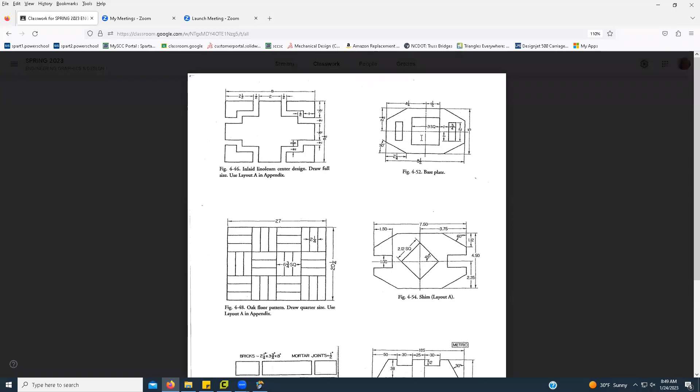Also, when you put it back in your box, you don't want to leave it out really wide. It can get easily broken. So you want to wheel it in about that much when you store it in your box. So yesterday we drew one that was just basically square. We want to add some circles in here, or what we would consider holes if we were actually making this.

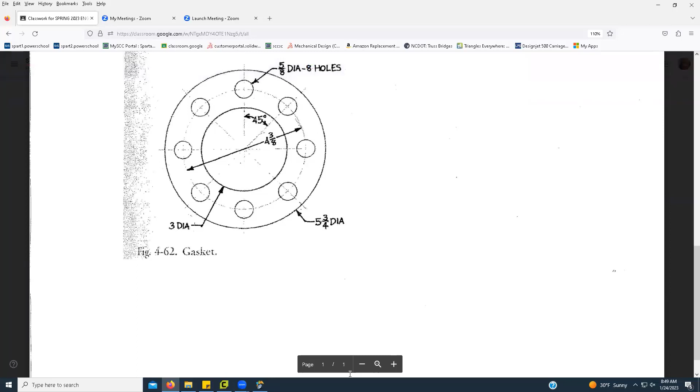So we're going to work off of the single view one handout here. And we're going to go ahead and make the gasket here, figure 4-62. So when we start this, it's a symmetrical drawing. We don't have to do any kind of figuring to get the center point because we can use our diagonals to get the center point.

So the first thing that we need to do, we're going to find the center point, and these are what we call concentric circles, meaning they share the same center. So if we're looking at the inside diameter, that smaller circle, that 3-inch diameter, that shares the same center with the others. So we're working off the same center. And we also have a bolt circle that has the same center. And then all of those smaller holes go around that center point.

So when we do this, we can actually find the center by doing our diagonals. And you guys have done this in a sketch, so you kind of know what to do. Same application. You're going to put your scale out here, and you're not going to get the exact point because our scale is not long enough to go from the exact corner to the exact corner, but it is long enough for us to eyeball it and get super close.

Because remember, it's not as important to get exactly in the center of our paper as it is to get the drawing exactly right. Because we're producing what we draw, not producing the center of the paper. So this is just kind of for aesthetics when you're drawing. So we're going to draw just a line, and then we'll line it up with our other corners.

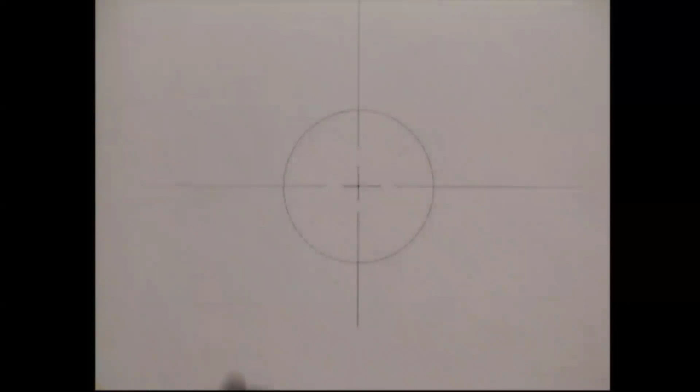So you're going to lean into it. If I'm making this circle, I can start here and lean into the direction that I'm going. So the key here is not to try to hold it with two hands, but try to put pressure on just this point, twist it, and lean it into the direction that you're going. Okay, so go ahead and try it. Remember, you're just twisting it like this, but leaning is the key to you keeping it on the same spot.

Now, if your compass jumps off of that spot, and it will, because your desks are kind of hard and you don't have the padding underneath like I do, just try to get it in that same little hole that is made with that needle point. If you get it in the same hole, then it's going to line up.

All right, the next circle that we can make is that outer diameter circle. And if you remember, that diameter is 5 3/4. So if the diameter is 5 3/4, we need to take half of that for the radius. So half of 5 is 2 1/2, or we could call that 2 2/4, right? If we're taking half of 5, that's 2 2/4. And then half of 3/4 is 3/8. So we could actually say this was 4/8.

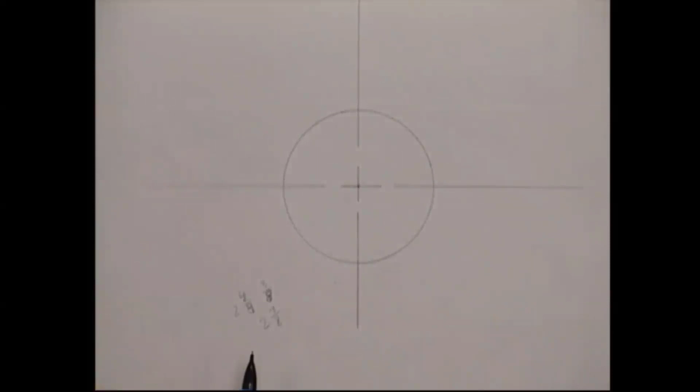We're trying to get the bottom number the same. Fractions are not super hard if you know that you need to get the denominators the same. So half of 5 is 2 4/8, and half of 3/4 is 3/8. So if we do that, that's 2 7/8. So if you break it down, it's not so bad. Break it down into pieces rather than trying to say 2 divided into 5 3/4. You can't use traditional math methods.

So I usually just break down the whole number and the fraction separately and then add them together at the end, which is a whole lot easier. You don't have to do any kind of special math. You're just doing two simple processes. Okay, so 2 7/8 is this radius.

If you remember on your scale, the eighth marks, if we're looking at our 16 scale, the eighth marks are the second smallest line. So the first mark is a 16th. The next one is 1/8, 3/16, 1/4, and so forth. But if we're looking at 7/8, we know that's almost to the whole number, but it's the eighth mark right before the next whole number. So we need 2 7/8.

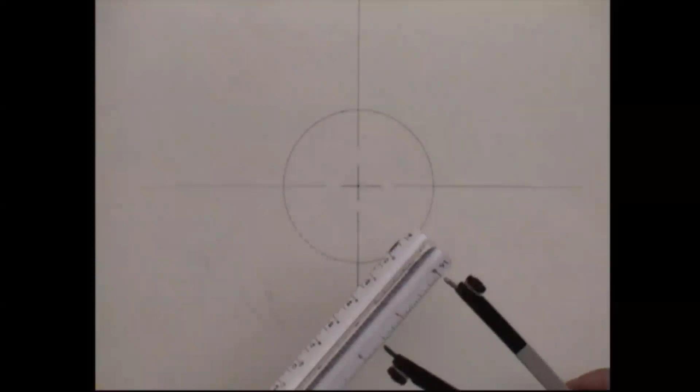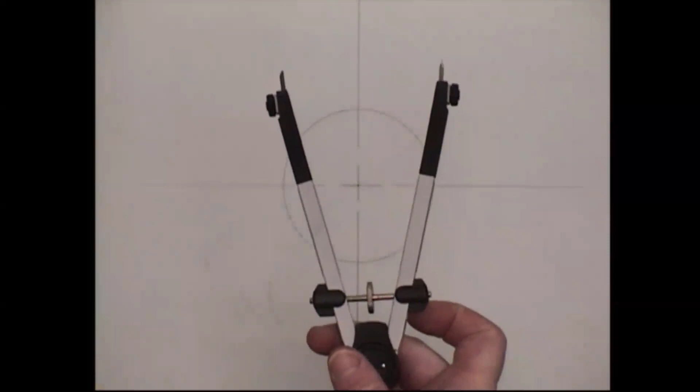So we're going to wheel our compass. I'm putting my needle point on the 0, and we're going to wheel our compass out, and it's going to be almost 3 inches. It's the eighth mark before the 3 inches. Okay. So that's how far our compass needs to be wheeled out. And if you look at just a top view of it, it's going to be about this much. So make sure your needle point is on the 0 and your graphite is on the 2 7/8 mark.

You want to try to use that exact same hole, because remember, concentric circles share the same center. So if we use the exact same hole, number one, we're only putting one hole in our paper. That hole will probably get a little bit bigger as we go, but you don't have 3 or 4 or 5 holes in the middle of your paper. You only have one, and it's acceptable. So then lean into your compass. You twist it with your thumb and your forefinger. Lean into the direction that you're going.

Okay, and we want to go ahead and make these dark, thick lines. These are visible lines, or what we call object lines. When you make them with your compass, you want to make them dark so you don't have to go back over them. And you'll notice my hole just got a little bit bigger. That's okay. In board drawing, you're going to have a hole, but you only want one hole instead of different holes. Number one, that's not very accurate because that's not the exact same center. And number two, it's not very aesthetically pleasing when you look at a drawing and you've got a bunch of holes in the middle.

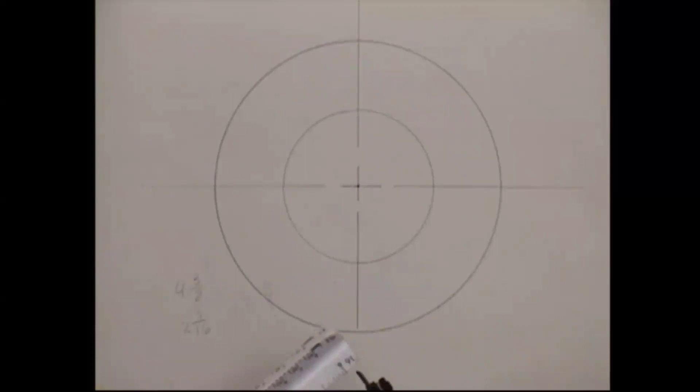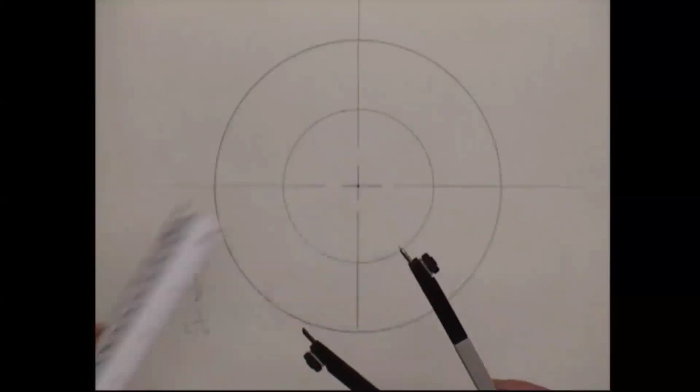So 3/16. The 16th marks are the very smallest on your scale because it's a 16 scale. So we're going to do 2 3/16. Again, you could put your needle on the 0 and wheel the graphite out to the 3rd mark past the 2. It's the smallest marks. That's your 16th marks. So 2 3/16.

The diameter was 4 3/8. We took half of that, which is 2 3/16. And we're going to put our needle point in that same exact spot and make this circle. Now we're going to make this one just a little bit lighter because it is a center line.

We don't try to put the dashes in it just yet. We'll put the dashes in. We can erase them out, but know that this middle circle is going to serve as a center line.

All right, so if we go back to the drawing, we can see that the small holes that go around that center circle that we just made, we call that a bolt circle, because likely these holes are made for bolts or some other apparatus like a shaft or something that they fit over. Because this is a gasket, gaskets are normally pretty thin. You could find gaskets in all kinds of machinery where you need good compression and you don't want air or oil or some other liquid to escape.

So these holes are 5/8 diameter, and we have 8 of those. So if you divide 8 into 360, you're going to end up finding this 45-degree angle. So they're equally spaced all the way around, which ends up being a 45-degree angle. So the first thing that we've got to do to create these holes is find the center point. So we're going to create these 45-degree center lines all the way around.

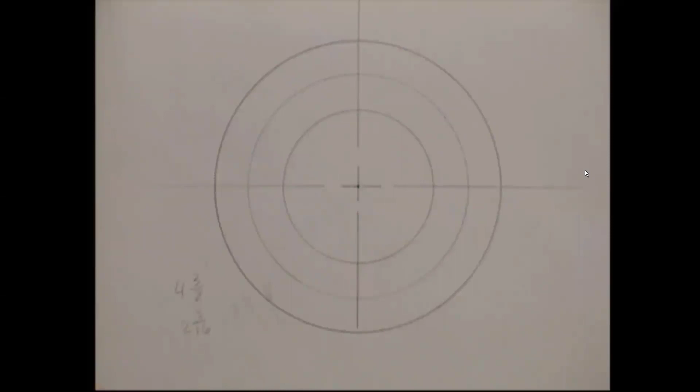We already have the quadrant lines. We have our center line that is at 90 degrees. So each of those points, we call that the quadrant of the circle, but we need to find the 45-degree points. So that's our next step. So when we use our instruments, we already have one that is 45 degrees, correct? We have the 45-degree triangle.

So in addition to your straight edge, we'll add the triangle, and we're going to make these 45-degree lines. So the way that we do this, we make sure it's flush to the straight edge at all times, and we'll just slide this up and down the straight edge to get where we need to go. So we're going to line up our 45-degree triangle with our center point of this hole. So try to line it up exactly with the little hole that your needle point made.

And then from that center, you're going to draw another center line that goes out. So remember, your center lines go just a little bit outside the part. So I'm making this line, you know, about 1/8 of an inch outside that part. And then to get the other 45-degree line, I'm just sliding my triangle over, coming from the center out.

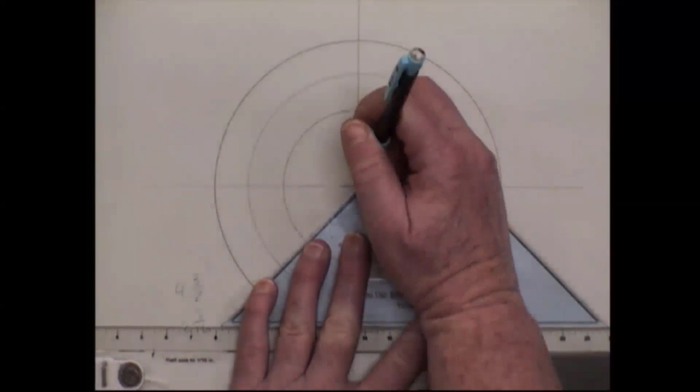We don't have the gaps in there yet, but we can erase out for the gaps when we need to at the end. So I'm moving my straight edge up so I can do the center lines on the top. Now, had I had my straight edge up or had it been a little bit bigger, I could have done all of those at one time. I have a small triangle, so I'm just realigning it and doing it in 2 steps.

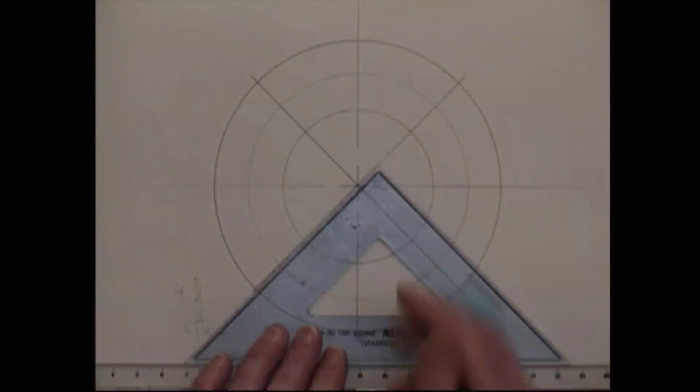So basically, I'm just moving my triangle across my straight edge, lining it up with the hole. And then I have my 45-degree lines. And again, these are center lines. They go a little bit outside of the part. And you want them to be uniform. Like my center line here is a little bit shorter than the others, so I can just add a tiny bit to it.

All right. So now that we have these 45-degree angles, we can make those small circles. So if we look back real quick at our page, the circles were a 5/8 diameter, and we need a radius. So half of 5/8, we times the bottom number by 2. That gives us 5/16. And remember, the 16th mark is the smallest mark on your scale.

So we need 5/16. These are going to be the smallest circles we've made so far. We're going to bring our compass in, and you'll find that the smaller the circle, the harder it is to make with the compass. So 5/16. We could actually just count 5 little lines over to get that 5/16 mark.

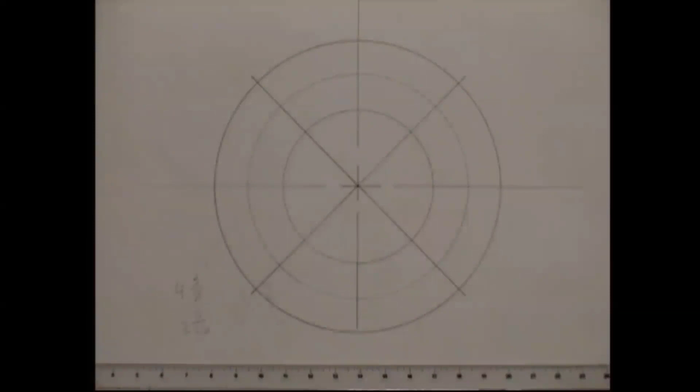Okay, so it's going to be a very small amount of space between our needle and our graphite. But we do have the center points for all these circles now. We have the location dimensions. Just as a reminder, two things we need to know about holes. We need to know where they are, which is this location dimension, which is where our center lines intersect with that center circle. And then we need to know how big they are. So the 5/16 radius tells us how big they are.

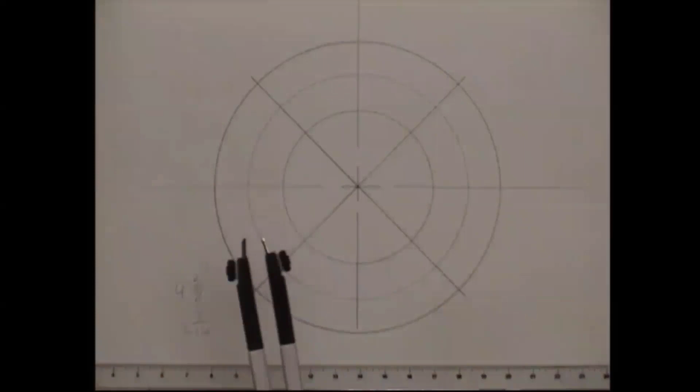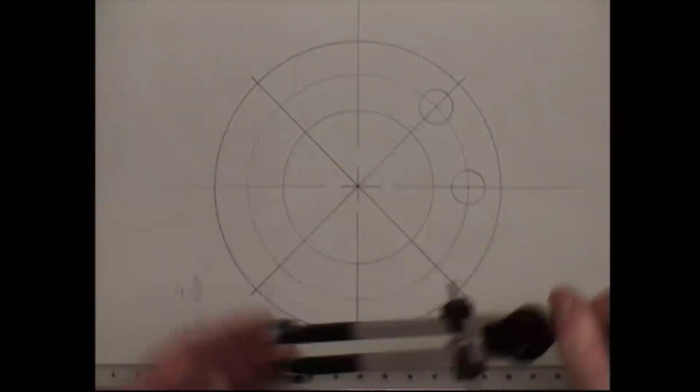So we're going to put our needle point in each one of these intersections and try to make those small circles. Now remember, the smaller the circle, the harder it is to make. So just do your best. This is really good practice. You know, sometimes beginners actually try to hold the compass with two hands, and it does not work out very well. If your lead has kind of died down and doesn't have as sharp of a point, you might want to sharpen that a little bit with your sandpaper pad.

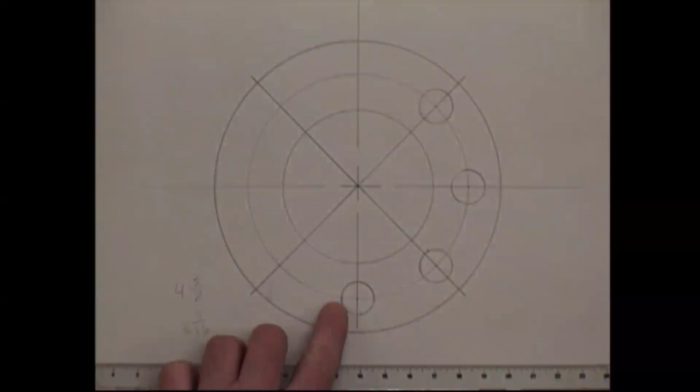And sometimes it's going to flip out of that circle like mine just did. If it does that, just get it right back in that same circle, and you can use your eraser shield later to erase the little pieces that you might have accidentally drawn on your sheet. So you don't have to stop what you're doing. You can go back and erase that. So my line width here is starting to get a little bit thicker. I want to be consistent. So that tells me it is time to sharpen my instrument. Okay, and don't sharpen it over your paper.

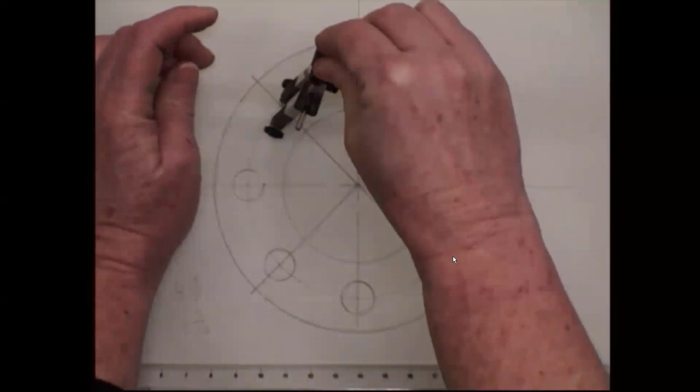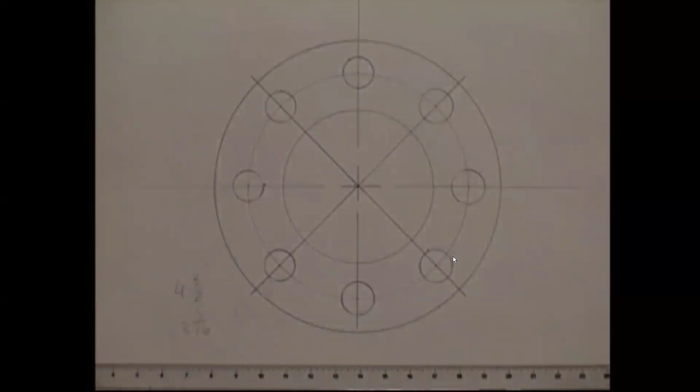So especially on these small ones, if you lean into the direction you're going, it's going to be a whole lot easier to make them. This is your first drawing with the circles, and you can see, mine's jumping out. So if you don't have a lot of practice, yours is probably going to jump out too. Just try to use that same exact hole. You'll find in board drawing, your eraser is your best friend. So if you mess up, that's okay. You can erase it and fix it. And I have a few spots where it jumped out, like here and here, that I would need to use the eraser shield to clean that up.

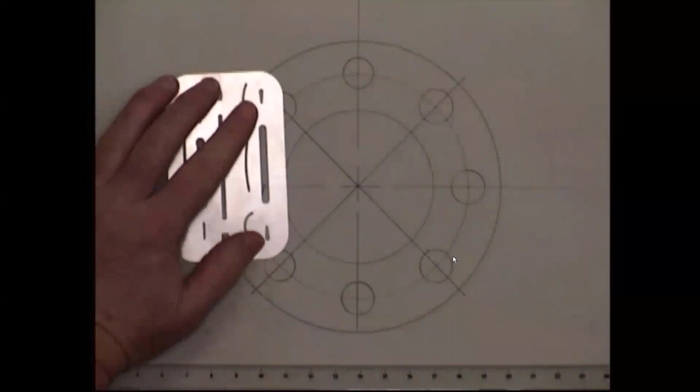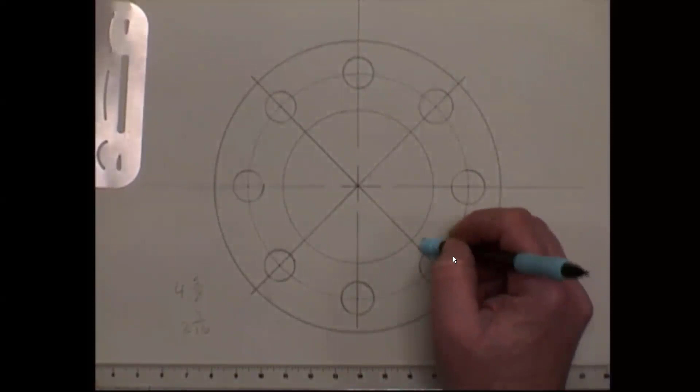So I'm taking my eraser shield, I'm putting it over what I want to keep and just trying to find a little corner somewhere that only has that spot where I want to erase. And then I'll stick my eraser in there, and it protects what I want to keep, erases what I don't. And sometimes you might have to go back over a circle with your compass, but you want to try to make them as uniform as possible while you're making them the first time. These are the ones that, when you're doing a board drawing, you want to go ahead and just make dark and thick as you're going.

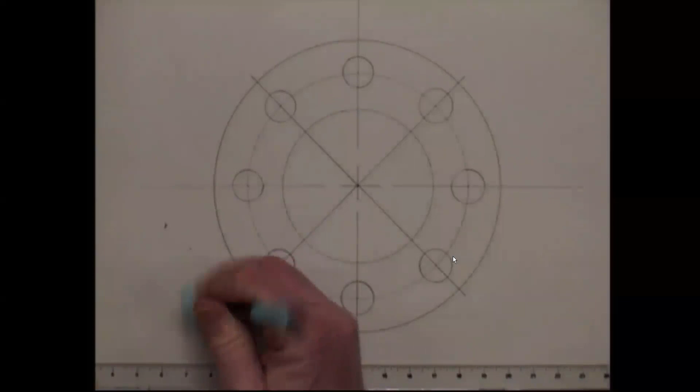So really for the object, we are pretty much done with any kind of functionality of the part. We just need to clean up our drawing. We're not going to put dimensions on this one on the board drawing. Eventually you will start doing dimensions in AutoCAD, but for us, we're just learning techniques. We're learning how to use our scales. And you will have a greater appreciation for AutoCAD once you get in there, if you've had to do it on the board.

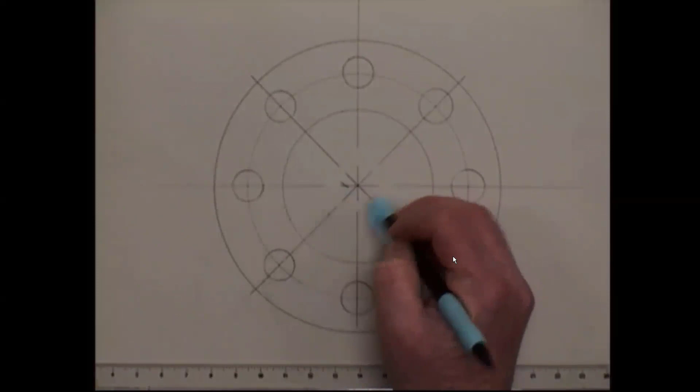So after you get the small circles, we do need to put some gaps in here for our center lines. This larger gap right here that we have for the main center, we need to straighten that up a little bit. We also need to have gaps in the angled lines that we made with our triangle. So our center lines in the middle here should have gaps between the main center point and where the lines extend out. Also, we need to have smaller gaps, and this might be where your eraser shield comes in handy. You can put it next to your center mark here. You want to have smaller gaps right here at the small circles.

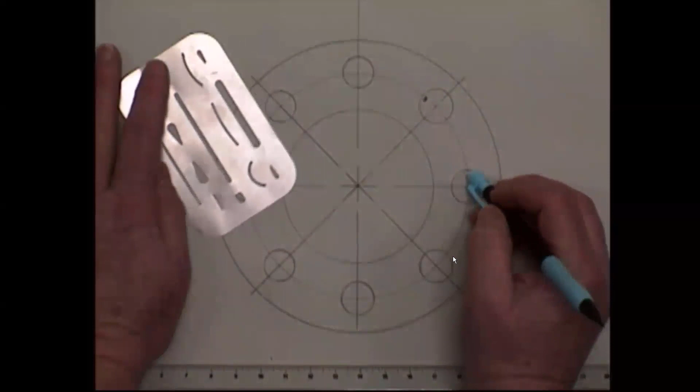So we still need to have the small plus sign in the middle to show the actual center. And then the rest of the center line is just a long dash. So your center line should have a short dash, a gap, and then a long dash. And that's what we need to do all the way around this center circle, or this bolt circle, and those lines that we made at 45 degrees. So we could take some time and clean that up, get the gaps in our center lines.

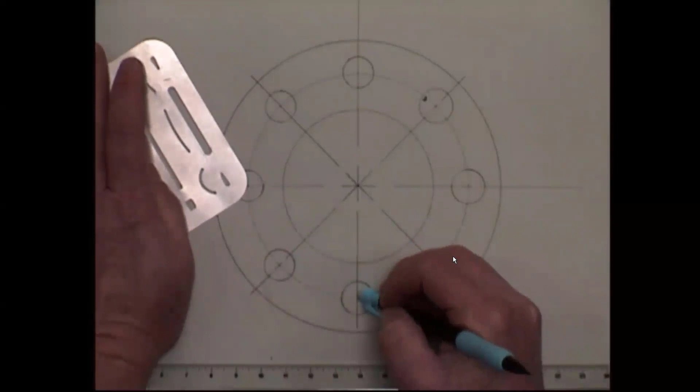We want to make sure, especially on board drawings, that you try to have uniform thickness. In AutoCAD, we can set our line thickness so it's not as hard. But like I said, if you are board drawing and then you transition into AutoCAD, you do have a greater appreciation, and you also have a greater understanding because you know what the system is doing behind the scenes.

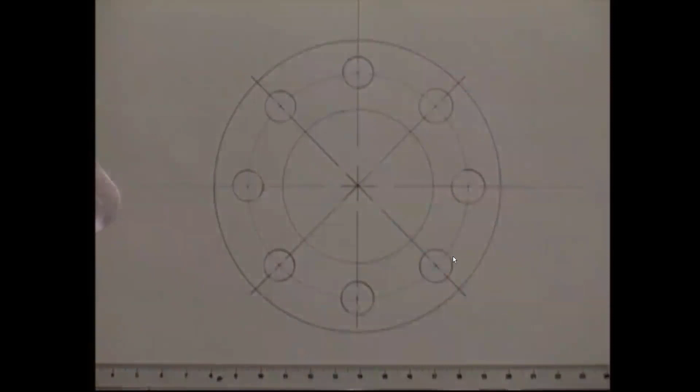We also want to ease down these center lines. Mine are not as uniform as they need to be. So I want all my center lines to go outside the object about the same amount, and that should be about 1/8 of an inch. That's the ANSI standard.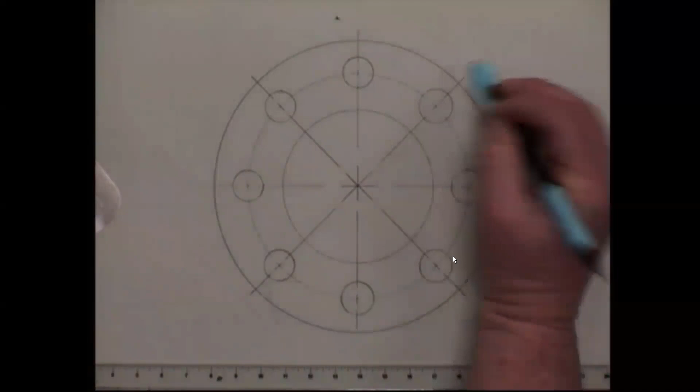This one is not quite long enough, so I'm going to put my straight edge back up there. You really don't need to make any lines without a straight edge. So I'll put my straight edge back up there.

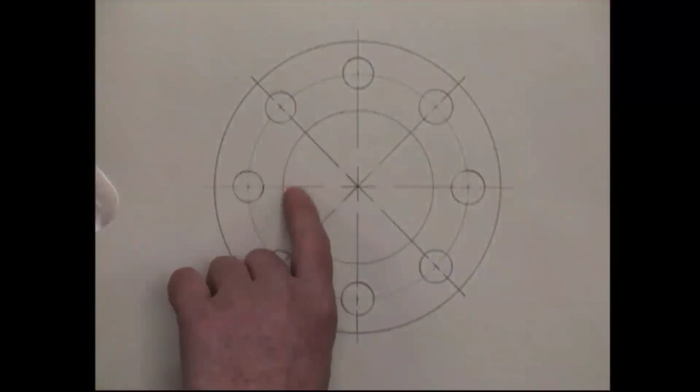I have a nice, fairly neat drawing, and I can continue cleaning this up a bit or making my lines the same thickness. Some things that you can kind of catch here in the camera: you can see this line looks a little thicker than this line. I really should have my center lines about this thickness. So that might be just a little bit too dark for a center line. Those are the kinds of things that you can look for when you're cleaning up your drawing.

So you can go back and finish cleaning up your drawing. Even if you haven't made all the circles, that's fine. We'll go ahead and proceed with our border. Now you've done borders before. We did one on the board drawing yesterday. You've done them on the sketches. The thing you need to remember with the borders, it is the darkest, thickest line.

If you're using the 16 scale, you're going to go in 1/4 of an inch all the way around your paper. So remember, that's basically just putting your 0 on the very edge of the paper, going over 1/4 of an inch. You can make a little mark. You're going to do this all the way around. So if you're not at this point, that's fine. You can proceed with me, or you can stay cleaning up your drawing if you feel comfortable with your border. If you do not feel comfortable making your border, go ahead and proceed with me.

So the first step is getting the actual border line. And this is the darkest, thickest line. We can go ahead and make it very dark and very thick. So with our straight edge, we are coming to our 1/4 inch mark that we just measured and drawing that dark, thick border line.

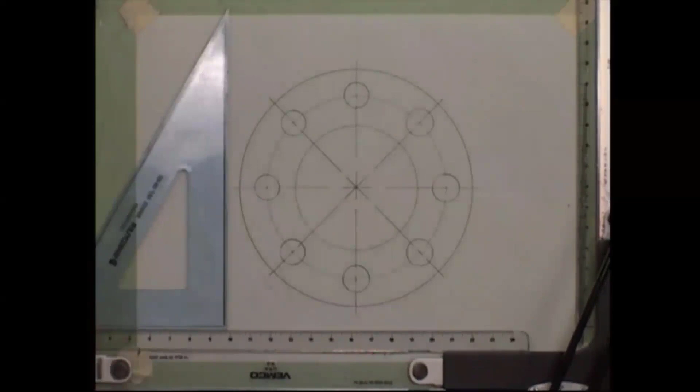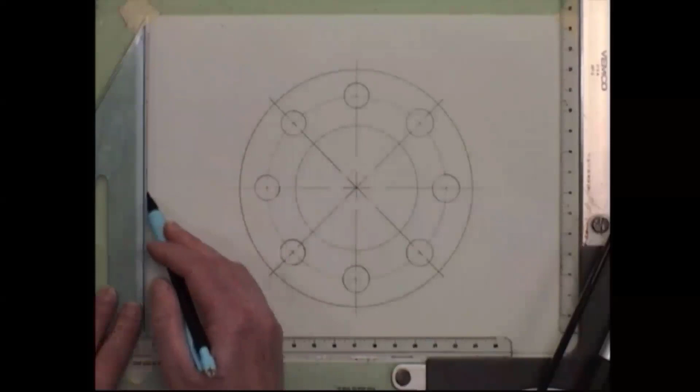And I want to make sure that I have it on my straight edge, and I want to make sure there's plenty of room. If you can see over here on the left, I don't want just a little bit of it on my straight edge. I want to try to get as much as possible on my straight edge so it stays firm as I'm drawing. So I need to keep it flush and up against my horizontal straight edge. Okay. And my triangle's not quite long enough, so I do have to move my straight edge to get all of this.

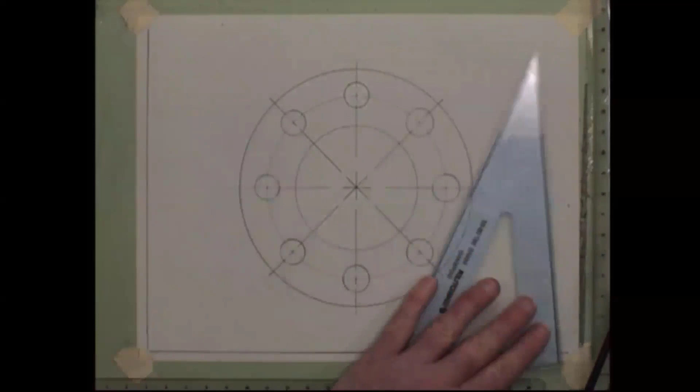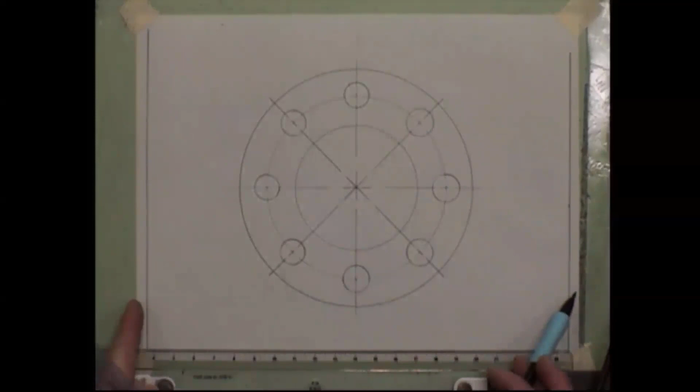So to do the border, I went in 1/4 inch all the way around. My paper is 8.5 by 11. So you're basically making your border a 1/2 inch smaller all the way around. So if this is 11 inch, between the border lines, it's actually 10.5 because we put a 1/4 inch space on either side.

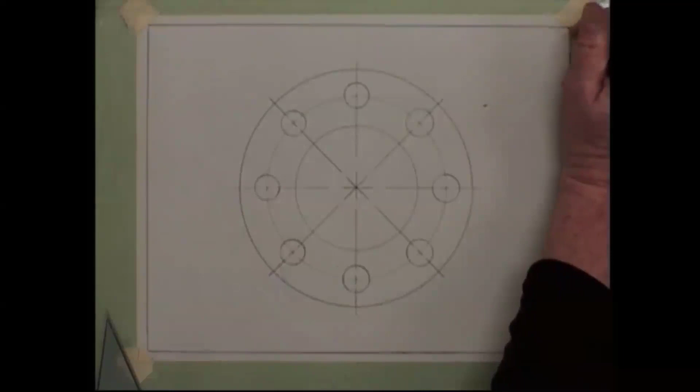We're going in 1/4 inch all the way around to get our border, and then for the title block, I'll put up the measurements. But the distance between the border line and the edge of the paper, 1/4 inch. And that follows the ANSI standard. We're using the ANSI A Form 3 template.

And if we look at the rest of it, we're going to do a 2-level title block here. The first line, we already have the border line down here at the bottom. The next line up from the border line is 3/8 of an inch. And then the next line up from there, this top of the title block, is another 3/8 of an inch. So we'll go 3/8 up and then 3/8 up.

Our letter height was 1/8 of an inch. So that should give us about 1/8 of an inch space at the top of the letters and the bottom of the letters. And it should be centered as much as possible horizontally in the box that it's in and vertically. So we will do those horizontal guidelines to keep the letter height at 1/8 of an inch. But as we're putting on these lines, we'll just go over and measure for the vertical lines and go up and measure for these horizontal lines.

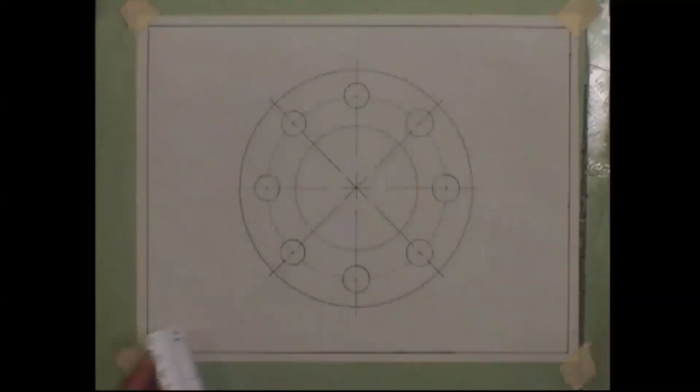But it's 3/8 of an inch from the bottom of the border to this first line, another 3/8 to the next line. And the 3/8 is important because that's going to follow the lines for your lettering guide. So if you're off on your measurements, your lettering guidelines are not going to work correctly. So make sure you get 3/8 of an inch for this title block.

Then we went over 2 1/4 and 4 1/4. So I'm going to leave this up for just a little bit so we can get our vertical lines. And that 4.87 is 4 7/8 in fractional form. So in the end, our boxes will look like this. Now we're ready to do our lettering.

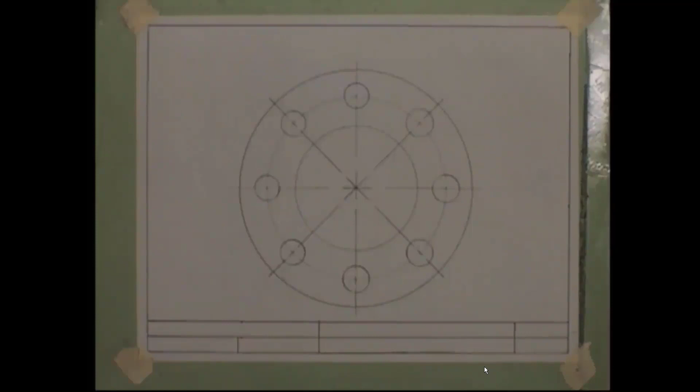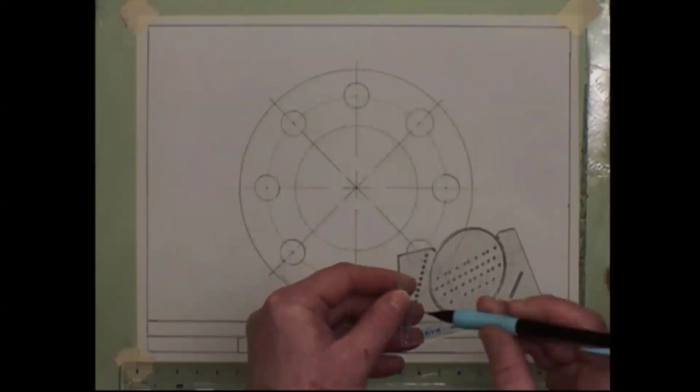And I know we used the lettering guide yesterday, but just to reiterate, we're going to use these holes on the side. They are already 1/8 of an inch apart. And we will stick our lead in one of the holes, but before we decide which hole, we're going to line 2 of the holes up with our border that we created. So down here in the title block, 2 of these lines should line up in the holes.

So if I choose this hole to line up with my line, then there should be 2 holes in the middle, and then that third hole should line up with my top line, because remember we made that 3/8 of an inch. So I should have 2 holes right in the middle, and then the outer 2 holes should line up with my border and my title block. This should be flush up against my straight edge, so make sure it is.

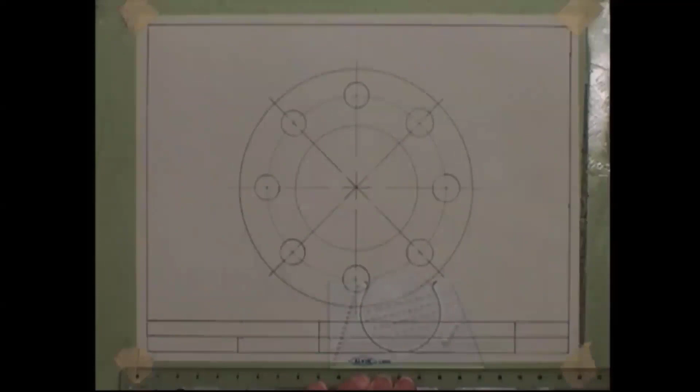And like we said before, you're going to feel like you need 3 or 4 hands to do this, but you'll get good at it. You'll apply pressure with your pencil to hold it down to the straight edge, but you'll just go across, and you really only want to put the lettering guidelines where you're going to letter something. And these should be super duper light. I'm making mine a little bit darker so you can see it on the screen. But these should be super light, so you don't even really have to erase them.

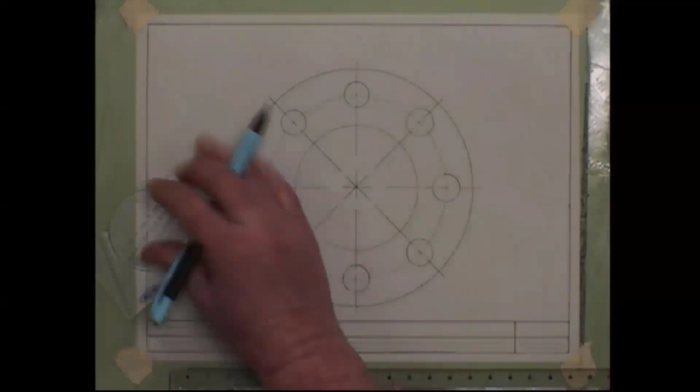And if you jump off, like mine jumped off because I came to the end of my straight edge, you just want to make sure that you get back lined up before you start making your guidelines again. And the same thing at that top title block, you should already have 2 of them lined up, and you'll just choose the 2 holes in the middle. So sometimes this happens. Mine just jumped right off the edge. That's why I said give yourself plenty of room on this edge, because if not, your instruments will not stay straight. So I'm going to get lined back up.

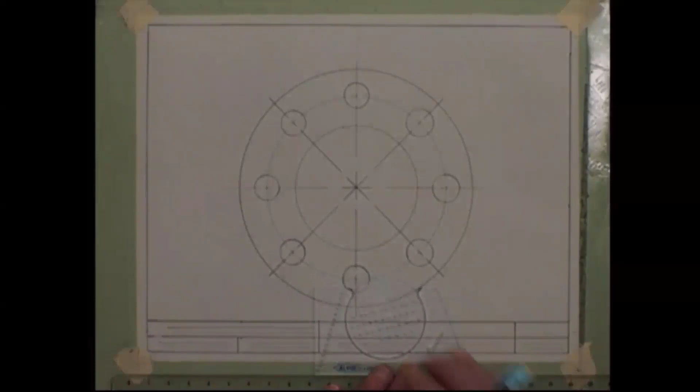So in the first box on here, it's blank, but we'll put on Swafford Career Center. Remember, all caps. In board drawing, we're using vertical uppercase Gothic. We're not slanting at all. We're making it 1/8 of an inch, all caps. The approximate distance between your words is your pinky finger. Unless you're a guy and you have really big pinky fingers, you might want to do a little less than that.

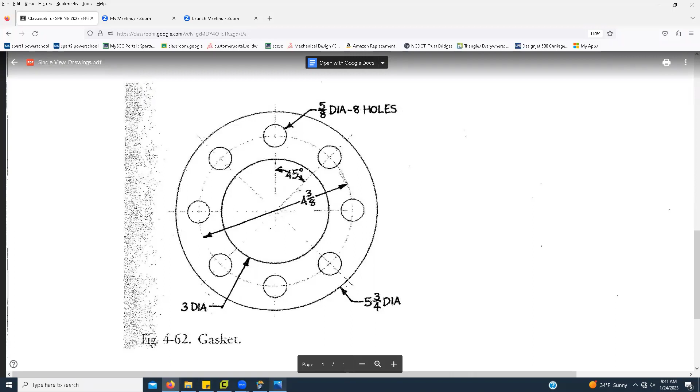And this figure number, let me look real quick. It was 4-62, and the title was Gasket. And remember, you can just shorten figure with FIG. It's very common to use abbreviations in mechanical drawing.

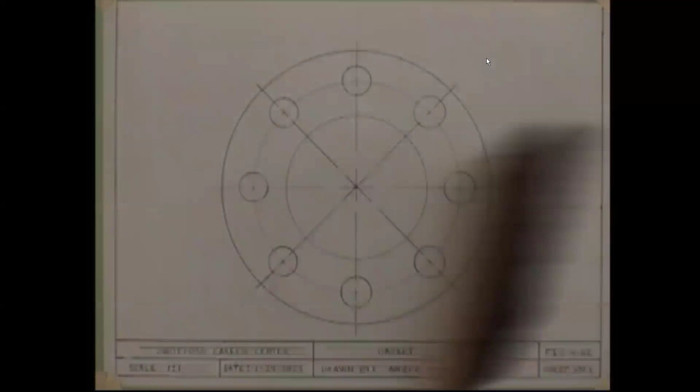All right, so I'm going to leave my drawing up here a little bit more. You guys are still working on getting yours cleaned up and getting those circles the way they need to be. But it's pretty much done. Whenever it looks like this, you're good to go.

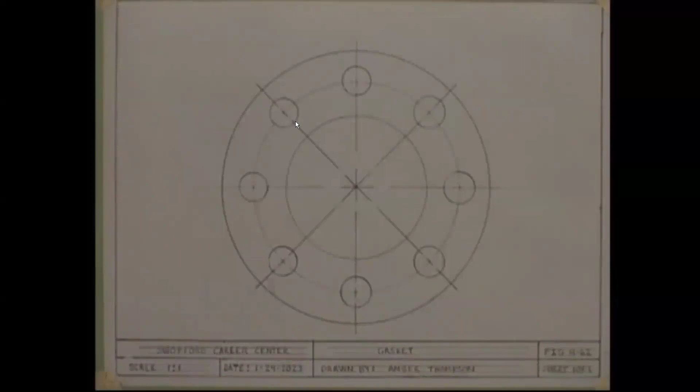You know, circles are hard, especially the small circles with a compass. But you can use a template, which we'll use next time. I'll show you how to use a template and get better circles when you need something smaller. Now the compass, you'll still need to use a compass for the larger circles. And so you will need to have practice with both.